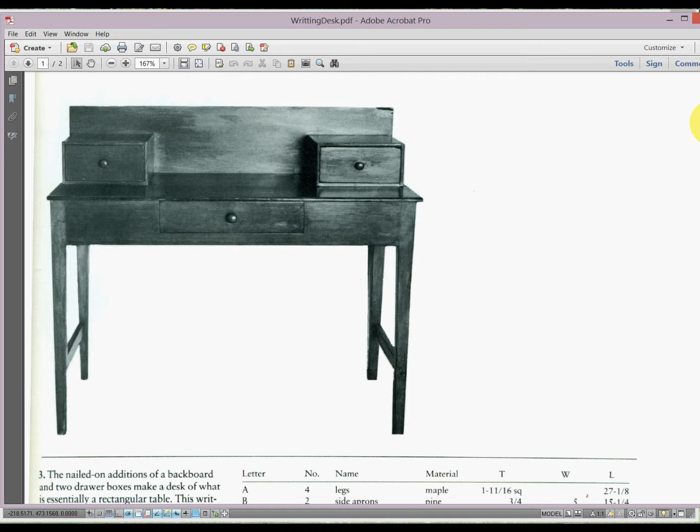In this lesson, we're going to be building a writing desk. And if you look closely, we can see that it has four legs that are essentially identical, and it also is symmetrical, meaning that the left and the right are the same.

So the first thing that we want to do is import the PDF file into our AutoCAD drawing. And we'll notice here that we have a scale. It says scale in inches. So we're going to use that as our template.

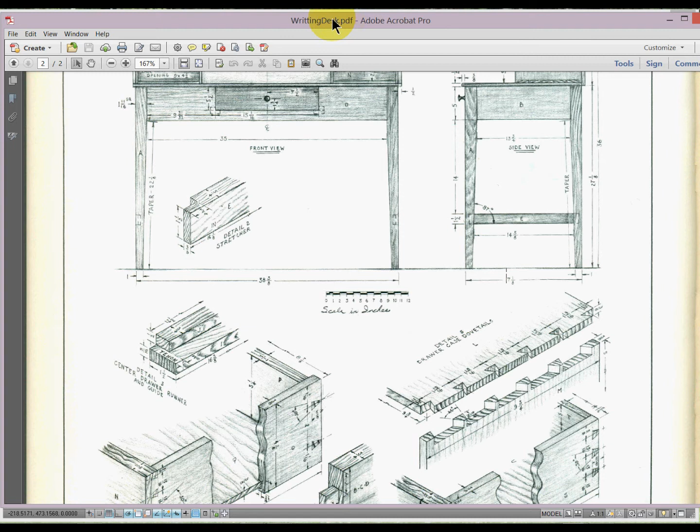So let's go ahead and open up AutoCAD, and let's make sure we're working in 3D modeling, and then in the settings make sure that our polar tracking and the object snap with a midpoint has been selected. Then let's go to the front view and let's get into the 2D wireframe.

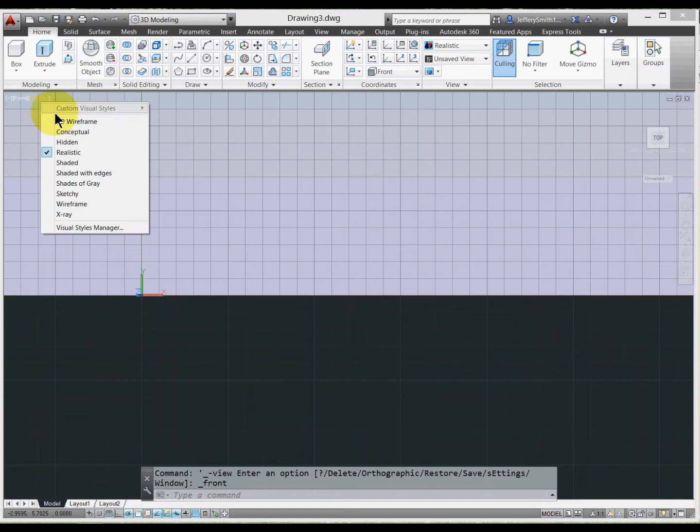And then what I'll do is I'll drag my writing desk PDF and I'll just drop it right in, and the page number that I need is 2. Press enter, put it anywhere you want, scale factor of 1, rotation 0, and there it is.

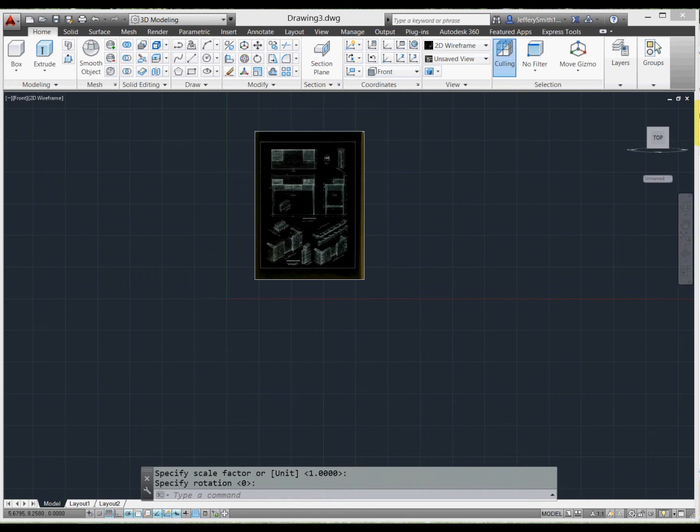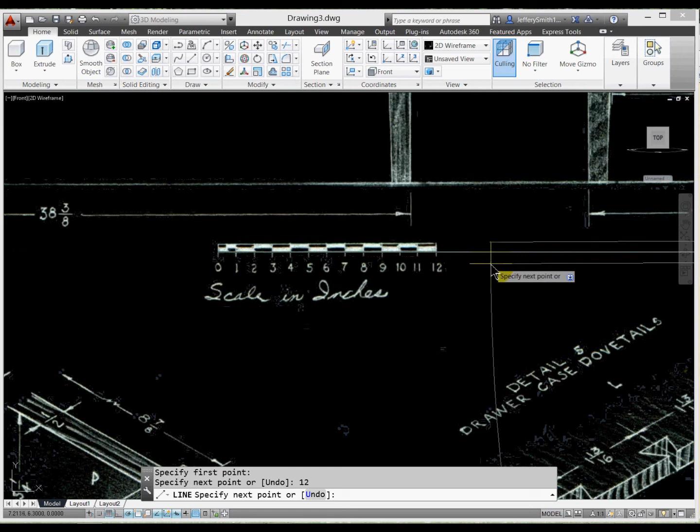So in order to scale this drawing, we will go ahead and make a line that is 12 inches in length. So I will go to the draw on the ribbon above, and I'll put it right at 0, and then I'll move it to the right, and I will type in 12 for 12 inches. Hit the escape key, zoom out here, and now I will type in scale.

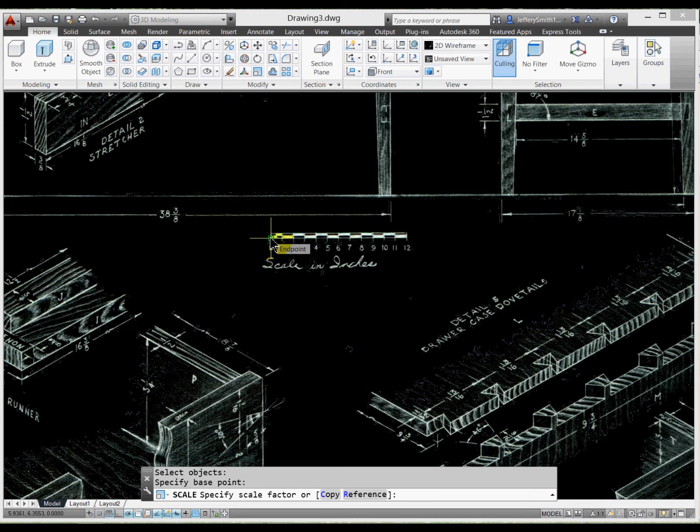I will select the PDF file and press enter. And the base point, I will select that base point of that line that I just made. But now I'll type in R for reference, or I can always just click onto the icon, and it wants to know the reference length.

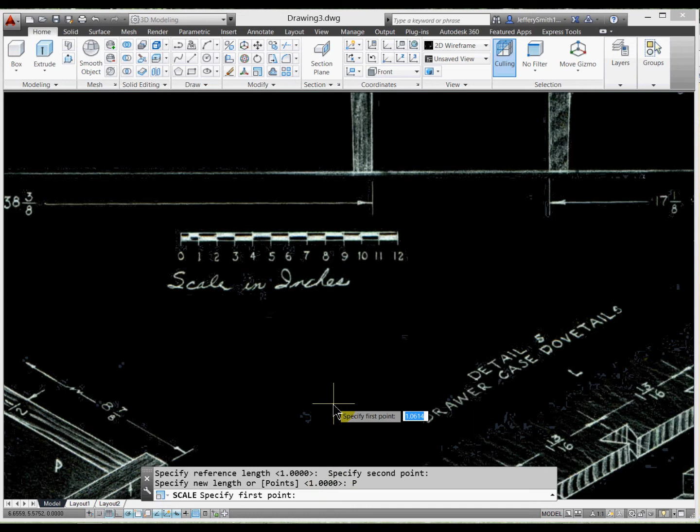So I'm going to go ahead and create that right here. So I'll stop at 12, and then now I'll go to points. So I can type in P or click on points, and the first point will be the 0, excuse me, or the 12 inch, and then I will go to the end point here.

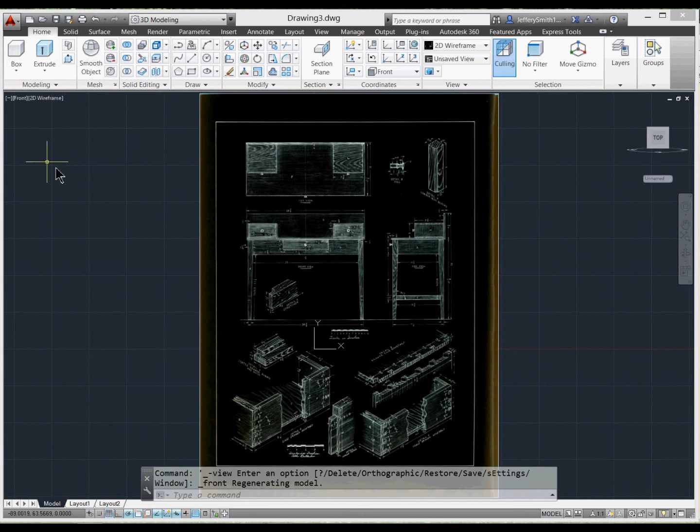And you probably won't see anything, so the thing to do here is just get out of the view and come back to the front view. And what you'll notice is that the 12 inches, that line is there. So if you would go to dimension, you can read it on the command line below, or just zoom in and see that it is now 12 inches. So now we have scaled the writing desk.

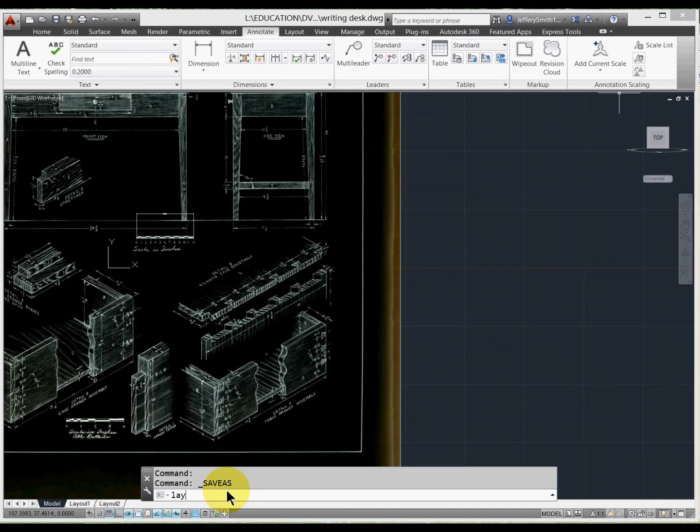So then let's go ahead and type in layer, and we will create a new layer which we'll put this PDF into. And so the way I'll do that here is I will just click on the icon for the new layer, and I will type in PDF.

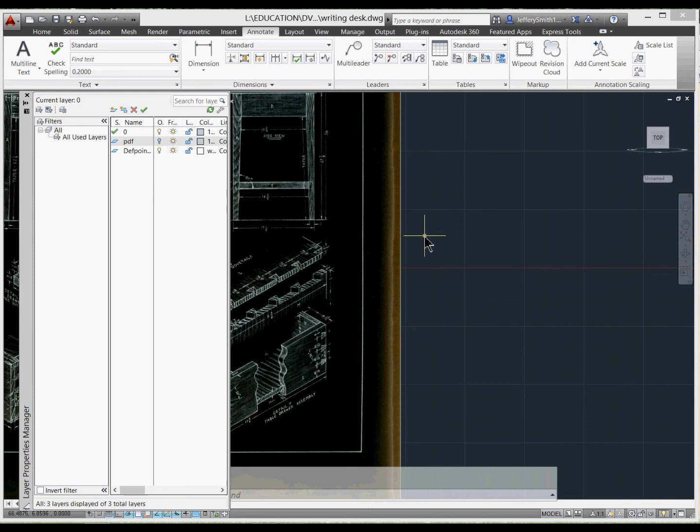And what I can do is turn it off temporarily, and then we will simply select the PDF file, right click and go to Quick Properties, and we can just put it in that PDF layer and it should disappear. And I turned it off just because it verifies that in fact it did disappear. And you can turn it back on if you need to, so you can continue working on the lesson.